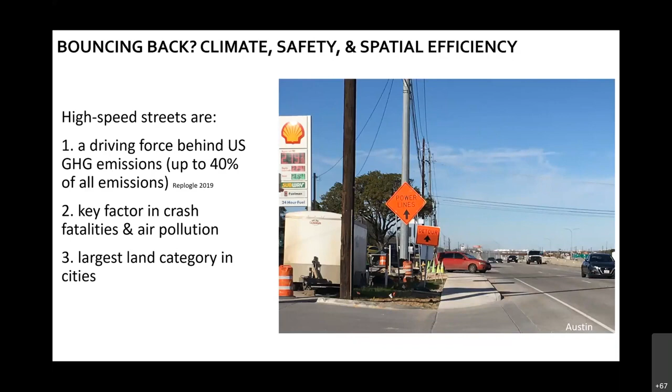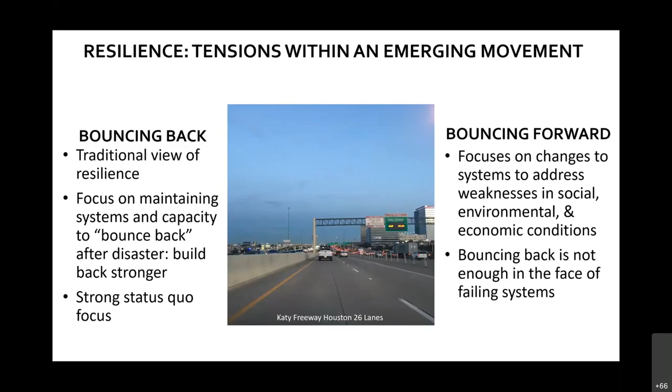So the idea is, how do we move from this bounce-back approach to transportation that focuses on the status quo, to changing our systems to address social, environmental, and economic weaknesses, to bounce forward from failing systems to produce something better—streets that are livable, healthy, decrease greenhouse gas emissions, and are adapted to the changing climate. So what we did is we looked across the literature.

And we came up with an idea called adaptation urbanism. It's an exploratory approach. We look at best practices from around the world and put these in context of an urban resilience framework. From that review of the literature, we found essentially that compact development, sustainable transportation, blue and green infrastructure, and equity are at the core of what creates great streets and public spaces. We used those terms to frame our research.

The goal was how do we create climate adaptation and climate mitigation and push that down to the level of streets. So in our research, we looked at case study cities, mostly from the global north—Copenhagen, London, Rotterdam, New Orleans, and Miami. We also did a more in-depth analysis in a policy chapter at the end, looking at Amsterdam, Barcelona, Delft, Utrecht, and Vancouver, and looked at what sort of street projects we're seeing there.

As we surveyed these cities around the world, essentially what we found is that in some cities you're seeing this real jump forward to streets of the future that are using climate adapted and climate mitigated technologies. And in many cities, you didn't see that jump forward.

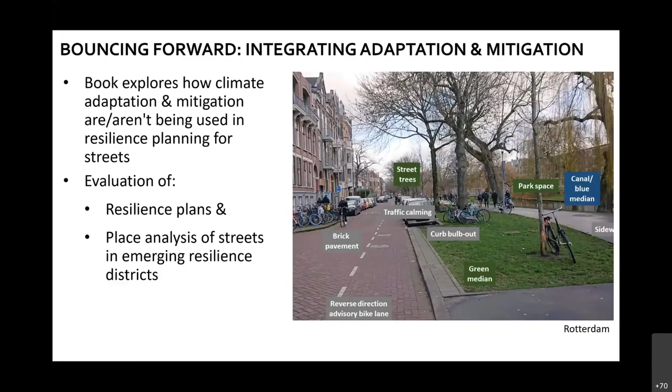So what we did was we looked at resilience plans in each one of these cities, and then we also did a place analysis, which is what you see here. We linked plans to places. We linked the idea of a regional city-level analysis down to streets, looking at what's happening in terms of resilience policy—how do we bounce forward? As we said, Copenhagen and Rotterdam were really meeting a number of these indicators, and some of our other cities weren't.

So an example you see from Rotterdam here is the Zoho Resilience District. We really saw that resilience districts were a great example of pushing these ideas forward, of taking plans and implementing them. What you see is it actually was a street environment, and they turned it into a water garden. The Zoho barrels you see listed there come down from the train tracks above and fill up with water. If there's a drought, the water then comes out into the water garden, and they fill up at other times. So you have this opportunity to take street spaces and address water concerns, whether drought or too much water.

So we essentially are moving towards spaces that are excellent in terms of livability and connections for walking and biking, moving away from streets being the driving force behind greenhouse gas emissions and high crashes, impervious surfaces and spaces of division, and really towards spaces of low greenhouse gas emissions, low to zero crashes, places of connection and spaces for water.

And what we found was that a number of places in the world are doing that right now. So we're redefining streets, moving away from the streets of the past. If you look up the definition of a street, for example, in Webster's, it's that part of a street that is reserved for vehicles. So it's a very narrow definition of streets.

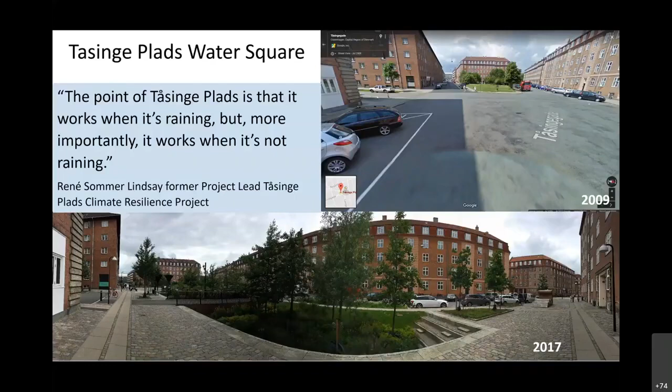Another space just to the north of this is Sankt Kjelds Plads, and this became part of the resilience planning district in the area. The goal was for Copenhagen to be carbon neutral by 2025, and then carbon adapted, where they can handle 30% more rainfall by 2040.

The image you see at the top, I took, it was just kind of an old asphalty traffic circle. The image at the bottom is the exact same spot. You see families moving through. You see this mini urban forest that soaks up water. Just an amazing example. It shows you the co-benefits of planning for climate adapted and climate mitigated streets, where you have improved quality of life, decreased pollution, and space for green and blue infrastructure.

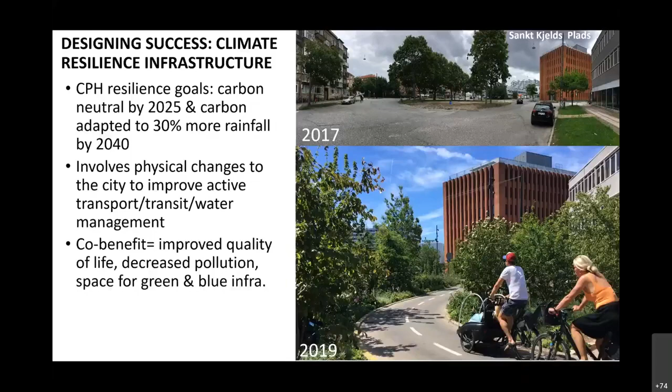What's great is this is something that happens in your mind: we need to be climate adapted, we need to be climate mitigated. Well, in reality, it exists. You can go to places and see what's happening. It's really exciting to see these changes.

My favorite small example of what you can do—you don't have to have a resilience district and make everything happen all at once. This is a street where they added, on the left, you can see a little bioswale. It's a bioswale cycle track, and it's perfect. It's very simple. It creates a safe space for walking and biking that decreases greenhouse gas emissions, and it's climate adapted.

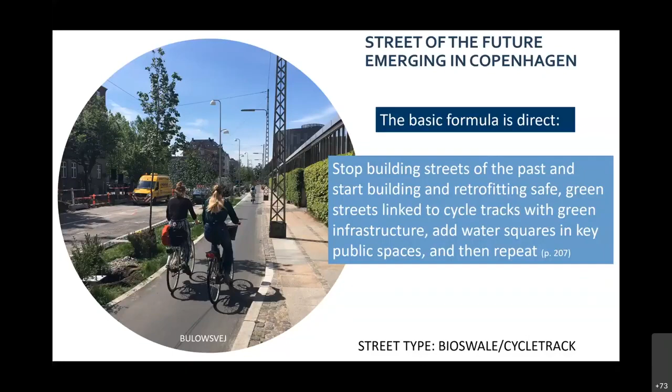So what we need to do is stop building streets of the past and start building and retrofitting safe green streets linked to cycle tracks with green infrastructure. We can add water squares like you saw from Copenhagen before, and then we need to repeat. This is adaptation urbanism in practice.

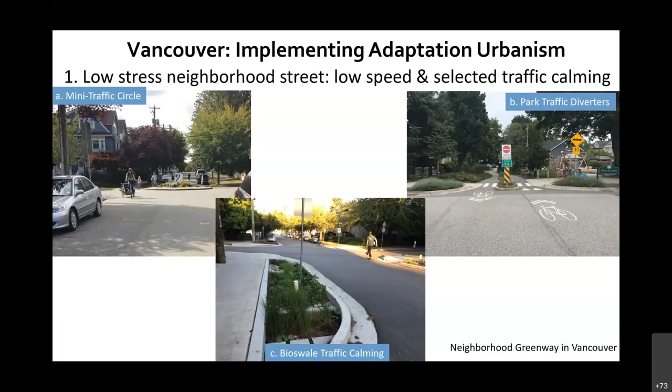Really quickly, I just want to give you an example of how this could work in a North American context, in Vancouver. Small mini traffic circles that slow down traffic, green infrastructure inserted into a park setting above, and small bioswales inserted into the street networks. Then downtown, you add cycle tracks with green separation. This creates safe Vision Zero types of spaces, and it's climate adapted. Really fantastic and straightforward.

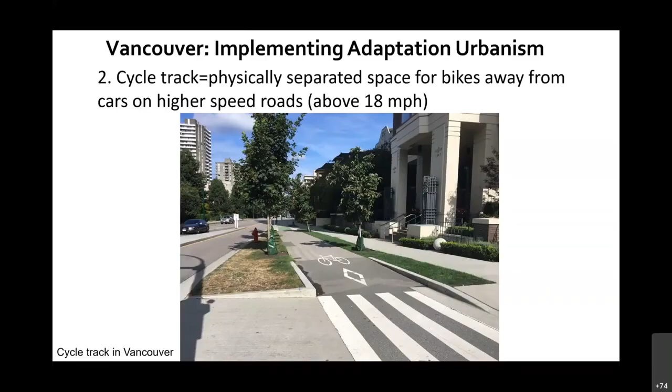We have the technology to do this today. We don't need—and we can always use more technology, that's good—but we know what to do. We just need the political will to do it. And when we do this, you also create great spaces.

These are the type of things that are possible if we make change. So with that, I will pass the baton to Liliane Geerling, who's going to talk to you a little bit more about Rotterdam and the changes that she's seen in her neighborhood in Rotterdam.

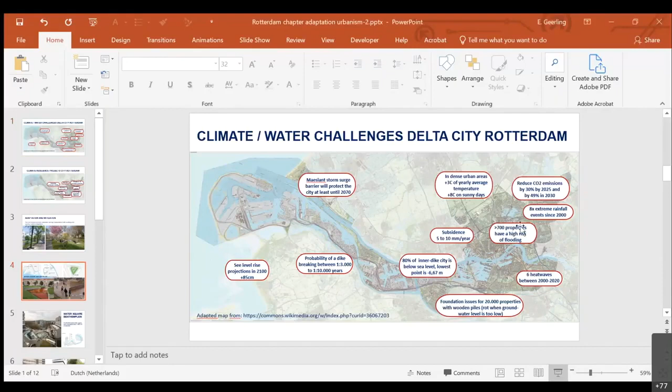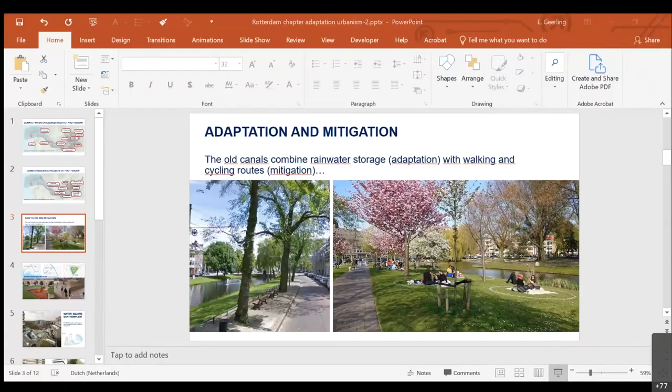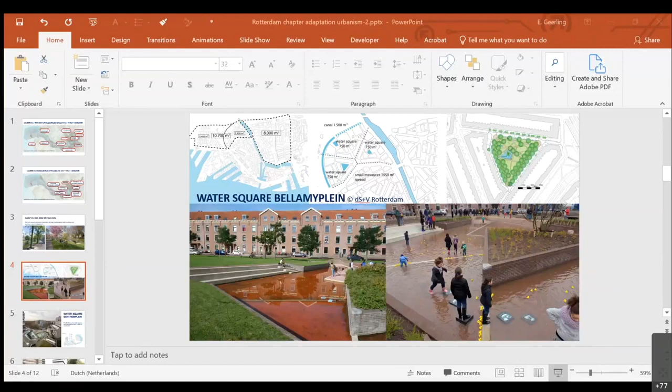So the new strategy of the city, can you see the current one, is adding water squares. What they literally do is look per neighborhood how much water storage is needed, and then translate that into public space to make amenities that are nice to visit 24/7, and only in times of heavy rainfall can they store a lot of the rainwater, which is just needed 5% of the time.

I think this is the most famous water square. Many people from abroad come and visit this one. You can do it in a green way, a soft way, but also in a more architectural way. Around this square there are many office buildings, a big school, all kinds of amenities, and a church as well.

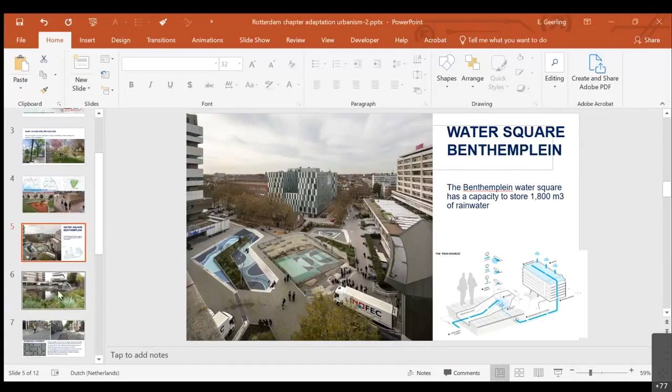The rainwater from the rooftops, but also from the surface, is led to those three basins. So when it's a heavy rainstorm, like we had a few days back, it fills up, and then when the sewage is empty again, the water is released, as you can see here. So then it looks like this, and it's still a nice square—you can still play with it, it's just a little bit different.

This very simple measure of changing pavements—you can do it in historic neighborhoods and use the red ones, but also in newer streets—is just a simple way of making the whole area more permeable, instead of putting all the money into enlarging the sewage system, which is very expensive, while making nice public spaces that are always pleasant.

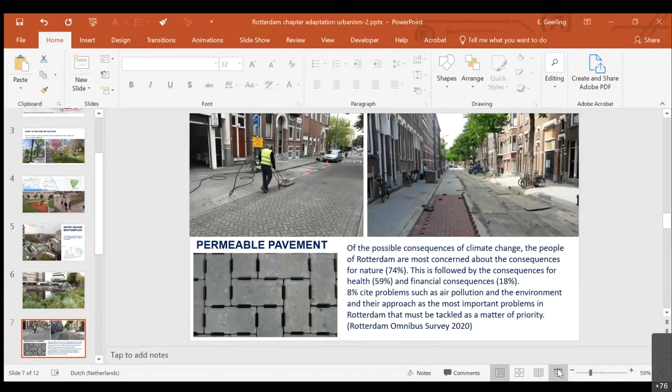In Rotterdam they now have a program where you can challenge the city. I'm no longer working for the city government; I now work for a University of Applied Sciences, training students on water management and spatial planning, and the combination of the two. But this is my street where I live, and the municipality wanted to develop a new plan for it.

We had some issues with storing rainwater—there was sometimes water on the pavement—but also cars were going way too fast.

It was not safe, so what we did was, since we had the canal next to us, add more green spaces, do traffic calming, and add all kinds of nice amenities. We made the whole plan together with all inhabitants, so we challenged the municipality and got some money to organize the participatory planning, but also to make the design ourselves.

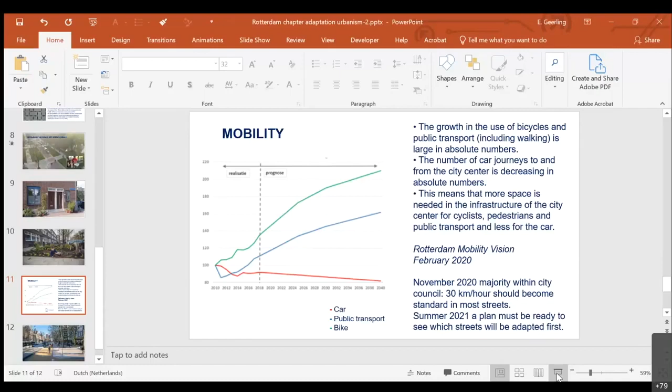Many young people don't want to own a car anymore. And what was very nice is that just recently, last November, the majority within the city council voted that all the streets where it's possible should be changed into a 30-kilometer street. Probably you all know that casualties go down a lot when it's changed from 50 kilometers per hour into 30. And where this is being implemented is in the main street of Rotterdam.

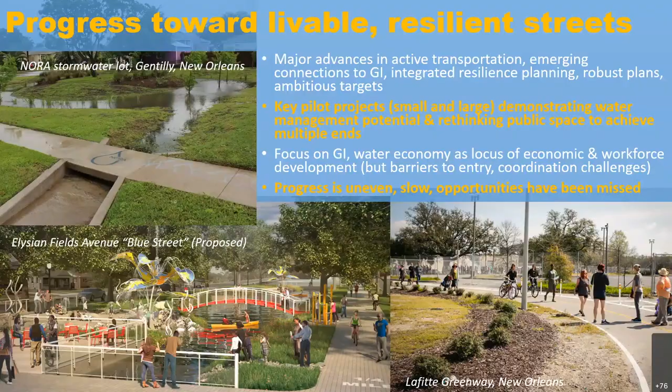Simultaneously, the city has come to understand that the water economy and adaptation are an important economic and workforce opportunity, and has been investing in developing this sector with now a focus on racial and economic equity.

As with the Gentilly Resilience District, this is largely a grant-funded effort at this point, but the idea is that these are supposed to lead to bigger systemic changes in our policy and our planning that will make that kind of integrated thinking more of the status quo in the future.

In the meantime, things are a little slow. Progress is kind of uneven, and we've missed some opportunities along the way, but we're making progress.

Meanwhile, New Orleans has also been tackling one piece of the other side of the climate coin, which is the emissions mitigation, by encouraging non-automobile forms of transportation.

New Orleans has always been a city where a lot of people walk and bike. This has only increased in recent years, in concert with consistent incremental investments in better infrastructure. So most recently, the city made a commitment to add 75 miles of new bikeways over 2 years, and the implementation of that is underway as we speak.

And for the first time, these projects were really explicitly intended to center on lower income neighborhoods, communities of color that had previously really been left out of where new bikeway infrastructure was coming in. And also they're neighborhoods that have high rates of no vehicle households in the first place.

And so while a lot of the new mileage of bikeways in this case is coming from just simple roadway reconfigurations and not necessarily physically reducing the amount of space that we are paving overall, increasingly streets projects are starting to be considered more holistically to do multiple things, to address drainage, to manage stormwater, as well as adapting for multimodal transportation needs. So several of the recent projects that have recently incorporated green infrastructure elements have been developed.

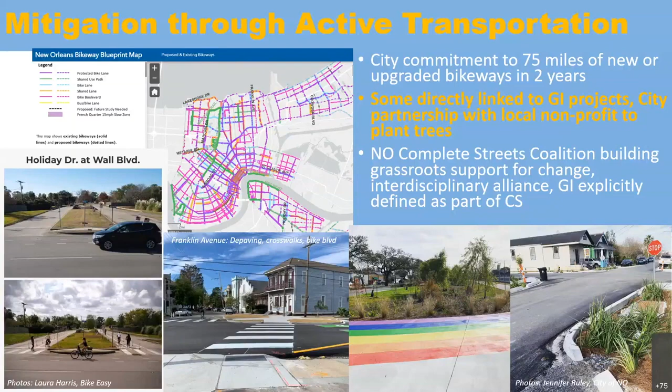So despite numerous promising advances and a lot of progress, there's definitely still a lot of work to be done here. As with pretty much everywhere, COVID-19 has exacerbated existing economic inequalities. New Orleans' huge tourism sector has been very deeply impacted, and there's not really an end in sight in terms of increasing housing prices.

In addition, we still have really serious safety issues to grapple with on our streets, so the mitigation potential of active transportation is still held back by our failure to meaningfully address these risks, especially on state corridors and other sort of trickier areas where local efforts haven't gone as far yet.

But the Green Streets approach that the city has begun to embrace is a really powerful tool for addressing both the flooding that impacts us on a seemingly weekly basis. I think we're still under a flash flood watch today. We were under one yesterday. It seems daily instead of weekly these days.

But it's also a way to take steps toward reducing emissions and meet the ambitious climate goals that we have set, while potentially enhancing community cohesion and livability for everyone.

Importantly, though, that cannot be done. Resilience planning cannot bounce us forward unless equity is really at the core of both the adaptation and the mitigation efforts. And specifically, in the face here of the effects of gentrification from multiple fronts and causes, and also reflecting our unjust histories of settlement and displacement, that really means that centering affordable housing is going to be an integral facet, or really a prerequisite, of resilience planning moving forward.

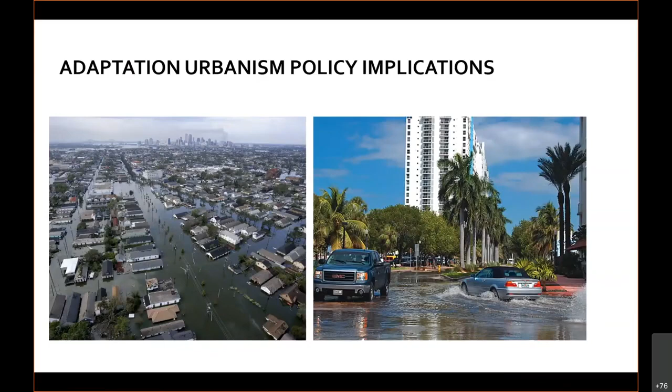Part of the obstacles that we've identified have to do with silos. We operate in the transportation world, the water management world, the environmental coastal management world, right? And those silos don't work, right? Because disasters don't care about professional silos. They come through, they wreak havoc, especially the more silos we have, the worse off we are. And disasters don't care about political boundaries.

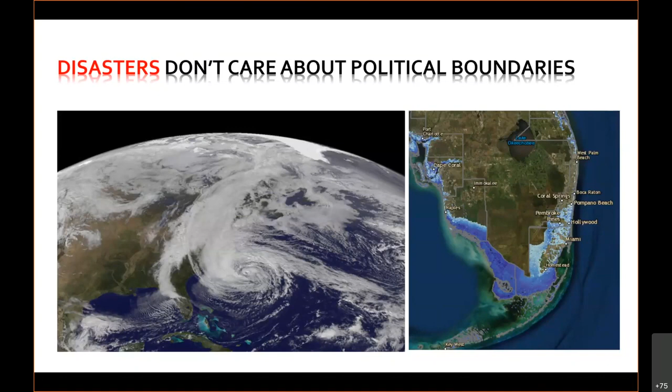So what we're proposing, in this bouncing forward idea of integrating, adapting our infrastructure and mitigating against future climate emissions, is we need to re-envision our streets as a central resilience platform, not just to achieve one goal, but to broaden out and look at safety, climate, equitability, and efficiency of space through different modes. We want to substantively link the funding to the core outcomes of the policy concerns in the climate change era. And we want to, from a political standpoint, look towards building a linked agenda across these different, very worthwhile initiatives like Vision Zero, equity, climate, and smart growth, and public health, and begin to better stitch them across. And it happens at multiple scales, at the local scale, the regional scale, and at the state and national scales.

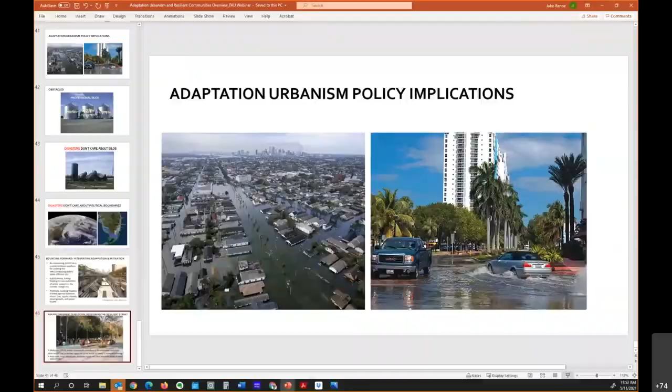Yeah, hi, I think I'm unmuted now. One of the questions that was asked, I believe by Shannon, is the Netherlands is such a great example of how to do livable, equitable green streets. Given land use patterns in the US, how do we ever move toward a model like what we see in the Netherlands? And I'm going to address that from the standpoint of the authors' concluding chapter. This will only take about two minutes, so it'll leave time for other questions.

In bridging this gap between the large region and the individual street, the authors say adaptation urbanism is about creating a new vision of the resilient city. So initially you have a new vision. Then, stop building streets of the past and start building and retrofitting safe green streets linked to cycle tracks with green infrastructure, add water squares in key public spaces, and then repeat. They say cities should begin with pilot projects. These pilot projects essentially are building blocks for creating a sustainable and resilient region, resilient districts, much like we found in Copenhagen. So you have these pilot projects, and then everyone wants the same thing, so they replicate themselves.